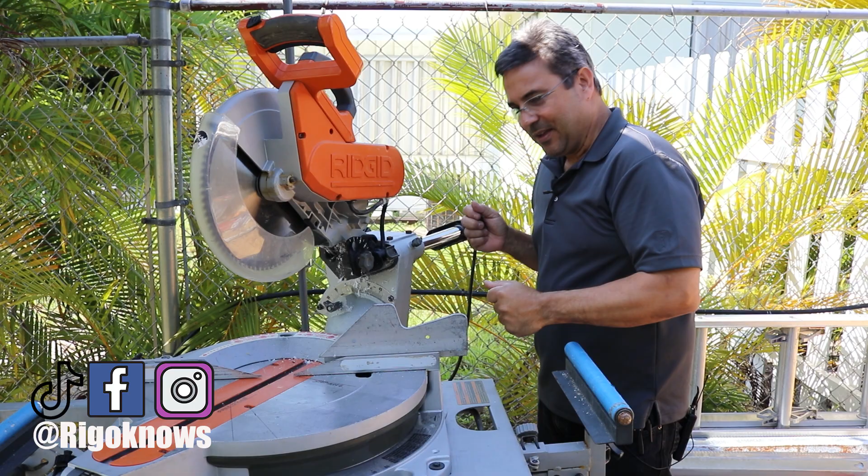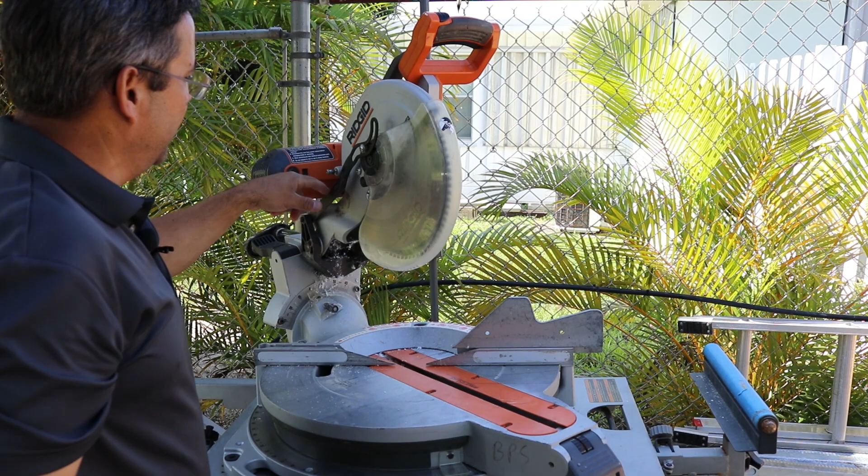Welcome back. We're going to repair where you hooked the cord to - it got snapped off, God only knows how. Also, another thing that broke was the guide to bring this up. It was a round thing here, and it's not there anymore, nobody knows anything about it. Well, we're going to 3D print a part, then come back and put it in, see if we can get this saw working. Now we're inside, and we're going to look at how we're going to make these parts.

This is the part that holds the cord on the saw. I'm going to talk a little bit about Fusion 360.

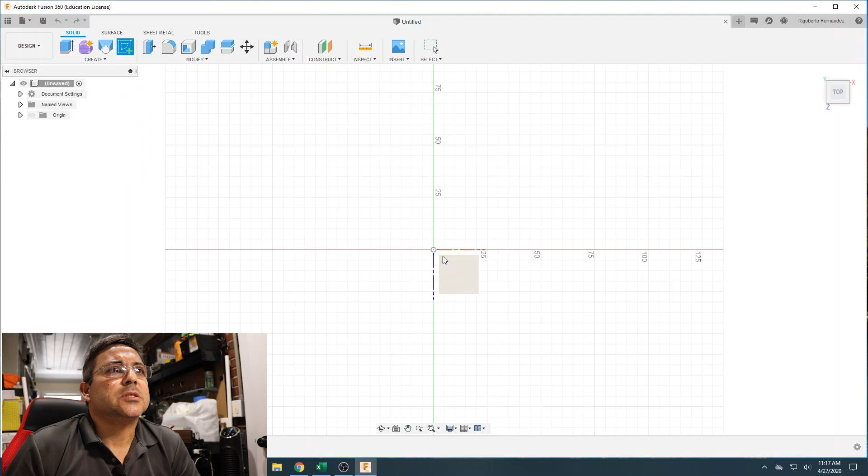So I'm going to make it exactly like this one. Now that the program is open, we're going to select top. I like to look at them straight down. So I'll select top, I'm going to create a sketch, and there we go.

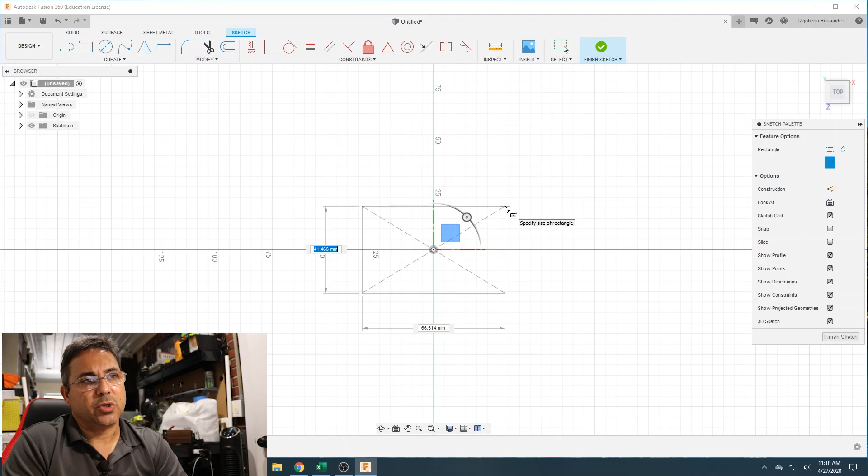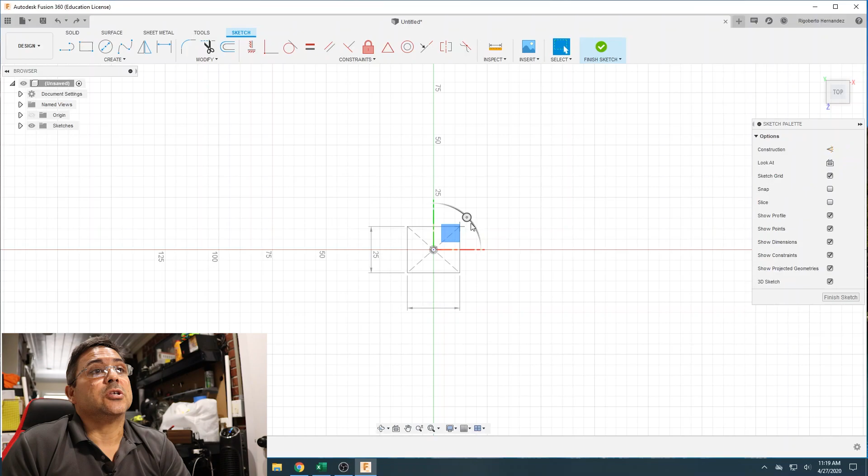Okay, I messed up - and you saw how easily you can mess it up. So instead of hitting enter, I'm going to tab so I can get the second number, which is going to be the side number, and that's 24.39. And there's my square looking down on it.

So now I'm going to extrude this. I'm going to finish sketch, 8 millimeters - you know what, I'll give it the exact amount. This is 7.73. Boom.

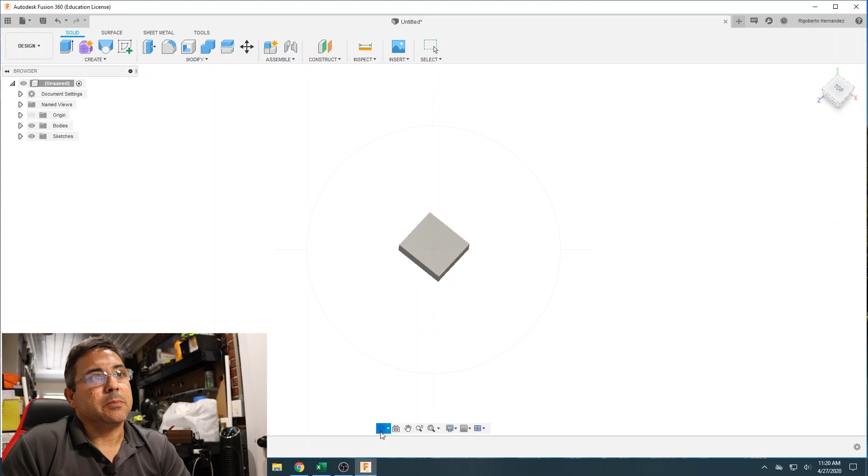So now you can see we got like a little solid block there. On the bottom part of this solid block, on this face, there's this little guy that comes out - it's like an L shape.

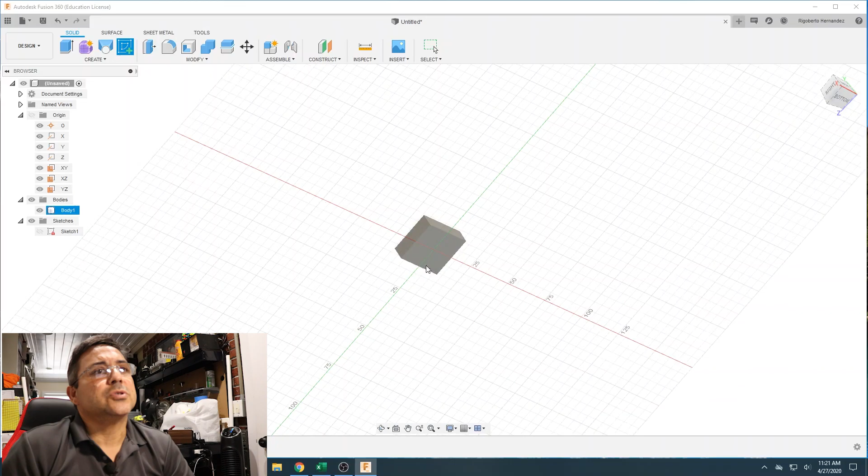So I'm going to create another sketch. I'm going to go to create a sketch, and we're going to choose - not the origin, which I could probably turn off. So now we choose the part that we're going to do, it's this one, and we're going to do another center rectangle.

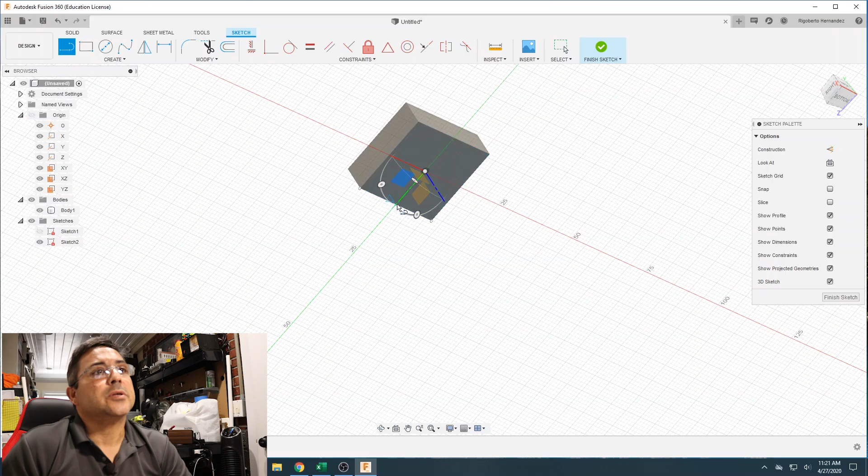Actually, before we do a center rectangle, I'm going to do a line. So I'm going to escape out of that. This thing is 13.90, so we're going to do a line, and we're going to go from this edge right there, to 13.90 - that's where our line is.

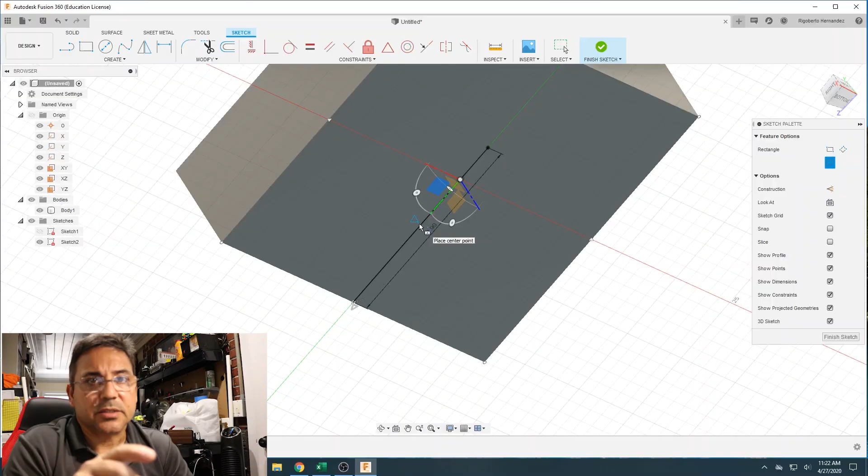So now when we do a rectangle here, when we choose a rectangle, get a center rectangle, now we can find the center of the line. This is important - the line gives you from the back of the part to the front of the part. So you're going to choose that, then come all the way up to there, and all the way out to there. And that's our rectangle. We're going to escape out of that, and then we're going to extrude it.

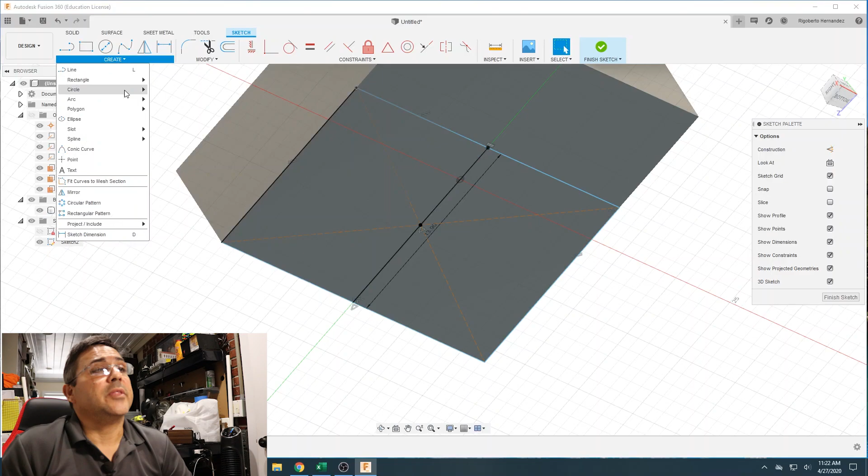I mean, this might not be the optimal way to do this, but at the end of the day, it gets it done. I'm going to make it a little thicker, a little longer, because the cord wasn't wrapping very good. So I'm going to go with 20.

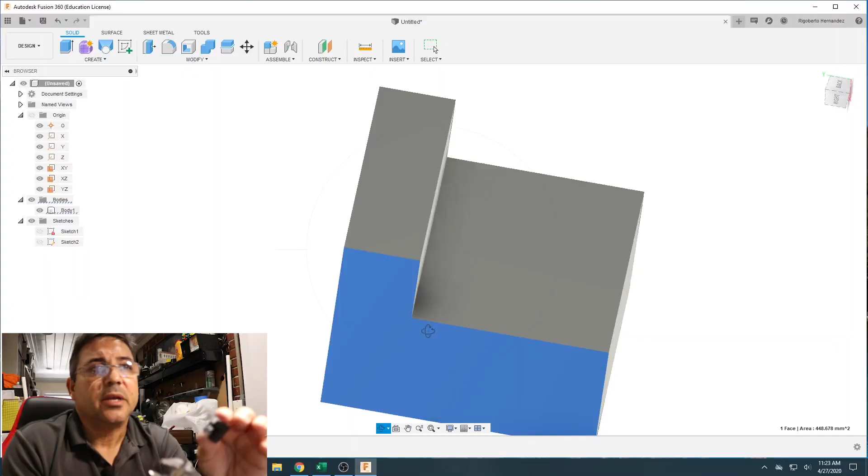And let's say that this part right here was too short this way, and you wanted to add a little more - so you can extrude it. Let's say you wanted an extra, and I'm measuring with my calipers, let's go with 5 millimeters.

So now we have a hole that goes through this part. We have a hole here that's a little under 10 millimeters, it's 9.50, and we got to locate where the hole is going to go. In this case, it's in the center.

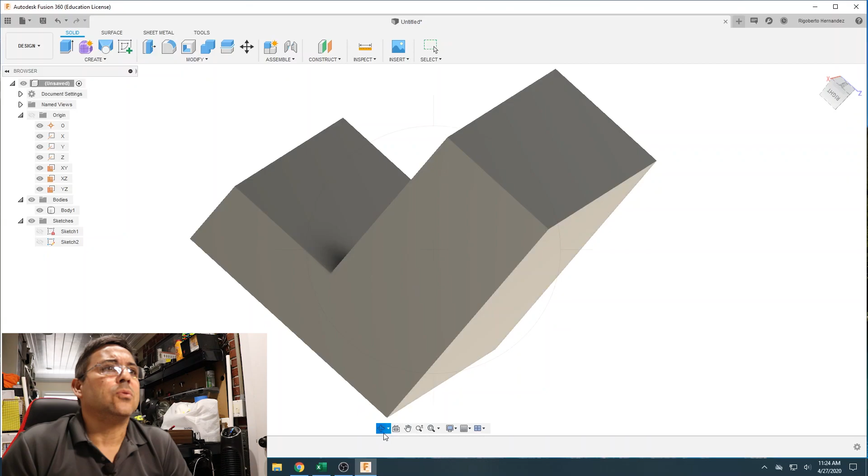So what I'm going to do is make the hole. I'm going to take this face right here and create another sketch on this face, and put it in the center there. I'm going to use the keyboard since it goes faster sometimes.

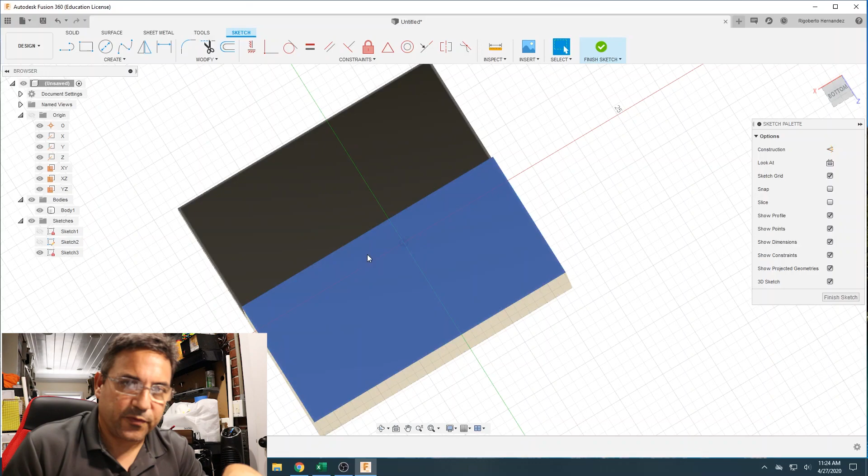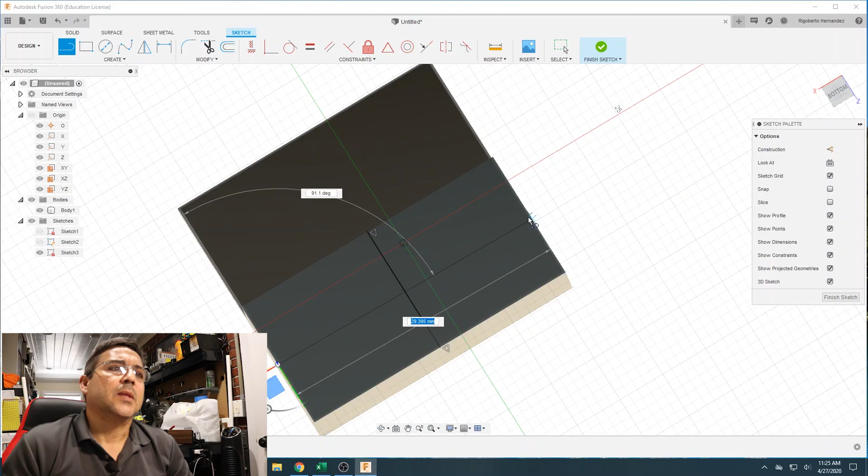If you hit L for line, it already tells you the little triangle means the center. So I'm going to go from there to there, and then from there to there. Now you can either stop your sketch, or, well, I just hit escape and there's your sketch.

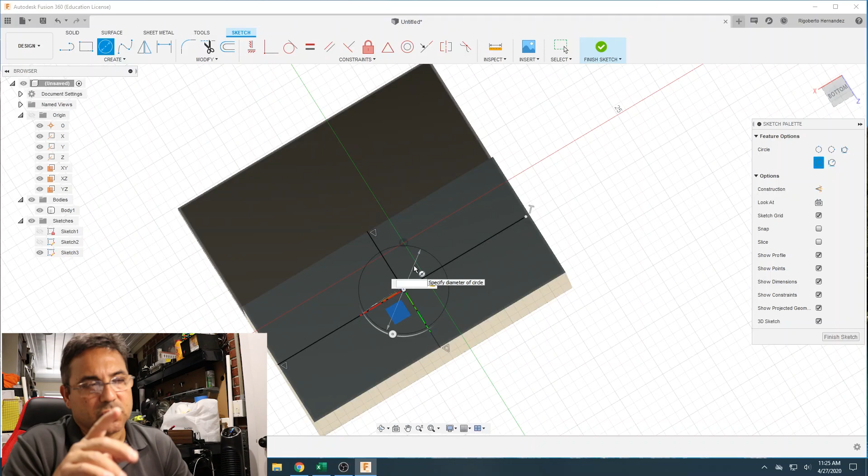Now I'm going to do a circle, C for circle on your keyboard, and you choose center. This is going to be the outer circle, 5 millimeters. It's the hole where the bolt goes through, 5 millimeters.

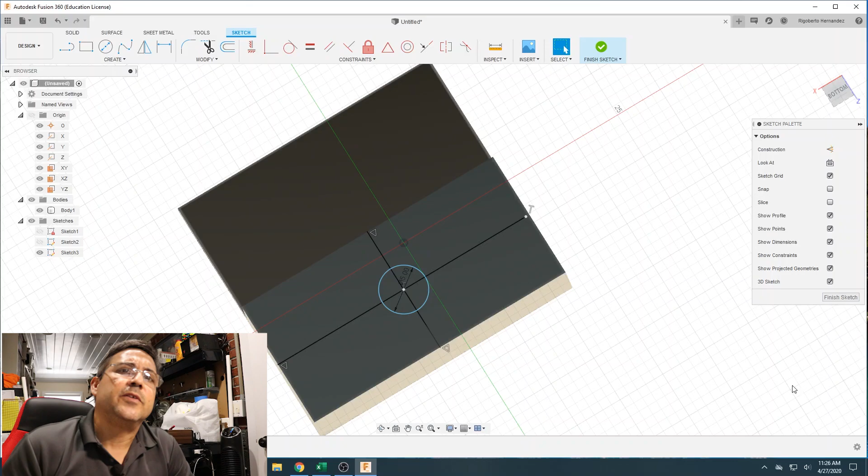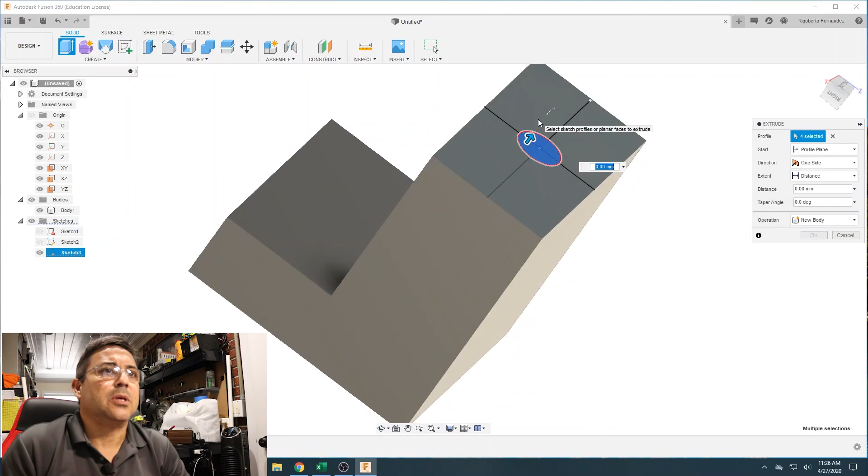We're going to extrude that first to go all the way through to the other side. So I'll finish the sketch and go to extrude. I'm going to choose all of these. You could delete the lines right away, but let's just leave them, it's a lot easier to fix things when you know what's there, and like I said, I'm not 100% on this Fusion software, so I'm still learning it. So I'm going to choose symmetrical over here, so whatever you pull one way, it pulls the other way too, just in case. Then you hit enter.

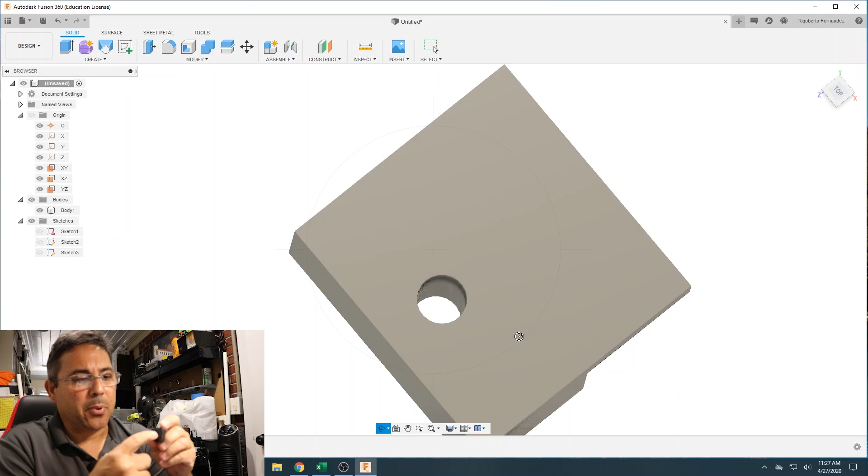Now we have a hole right through the part. Now this one has a bigger hole where the bolt sits in, so the bolt isn't sticking out. This one is, like I said, 950, and it's to a depth of, we can go with 784.

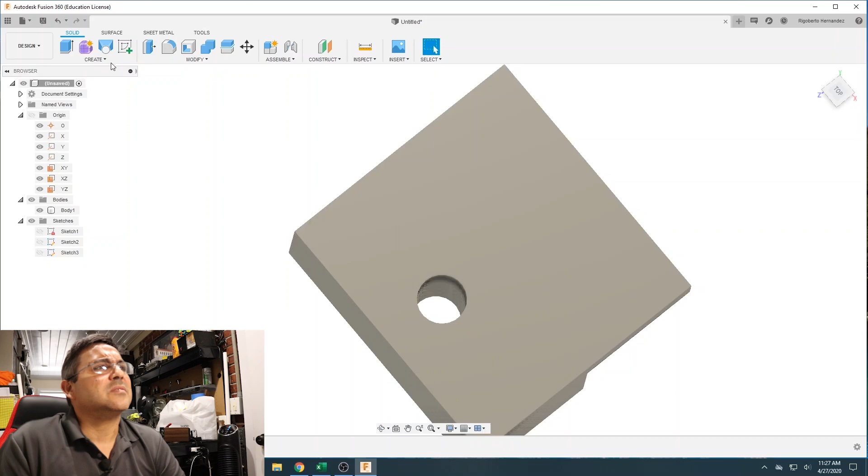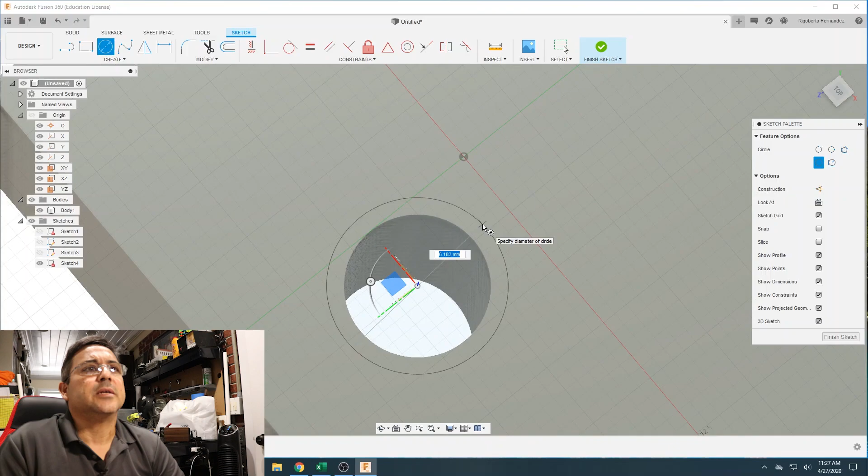So now we're going to create another sketch, and we'll choose the top of the part, then choose C for circle. There's a hole here, but it still gives you the center of the part. If you zoom in a little, you can see where the center is. So now you go with 950, hit enter, and now you can extrude that.

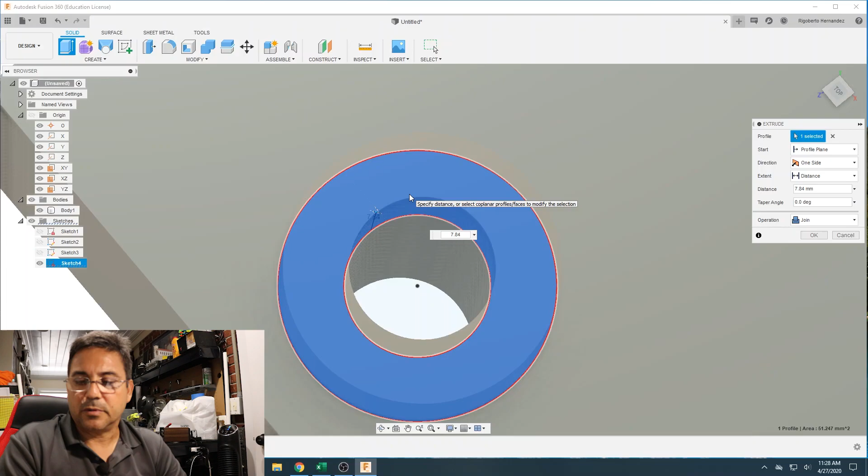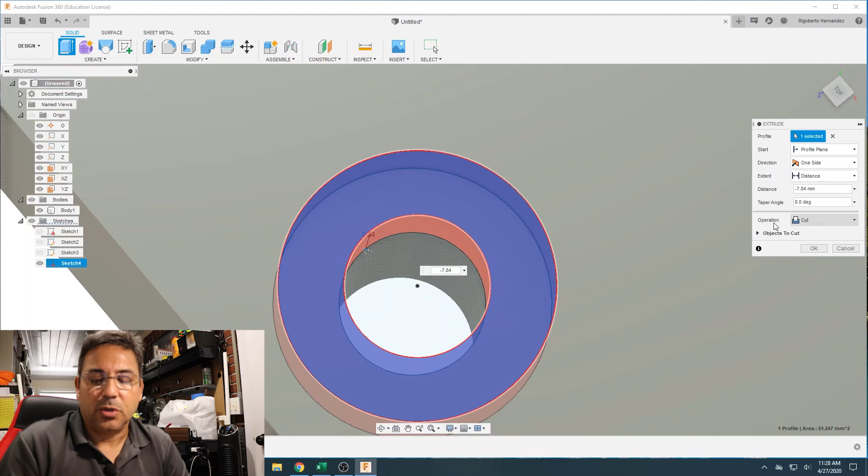Extrude, that's the part you're going to extrude, and you go down 784... 7.84. Wait a minute, I've got to put negative 7.84. That way, once you put negative numbers, you're cutting into the part, and if you look at this screen over here where it says cut, it's telling you what it's going to do. So you hit enter, and all of a sudden you've got a countersink in there for your screw or bolt or whatever it is.

You can see it's pretty deep. I mean, we could have gone...

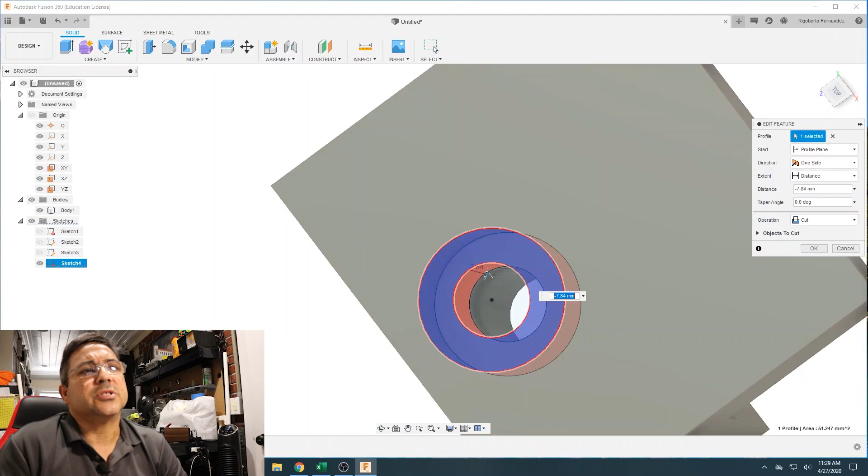Okay, so let's say you wanted to edit this. You can go over here to the commands, these are all your commands, this is everything that you've done, like a history of what you're doing. So you go here, hit edit feature, and you see how it's set. I can go 6 millimeters, negative 6 millimeters. So you could go on any of these and edit any time.

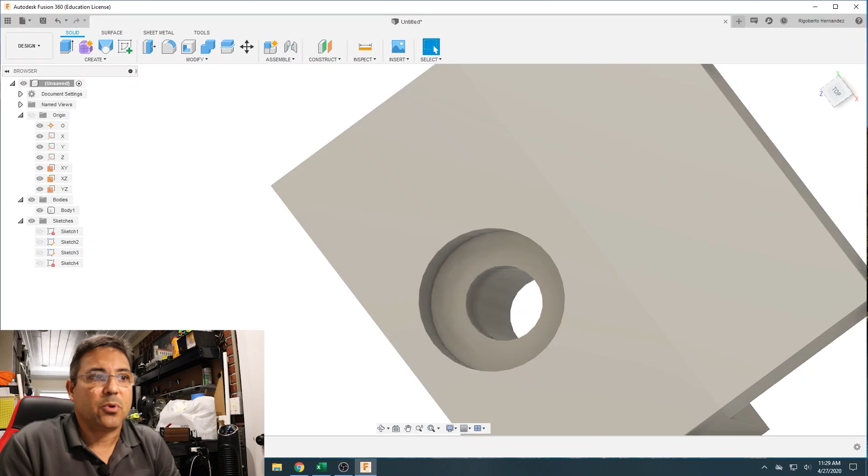Remember, once you edit whatever you did previously, it's going to affect the whole part. So you've got to be careful with things you edit, because it might go back and change a lot of dimensions on something else in your part. But for this application, we should be fine.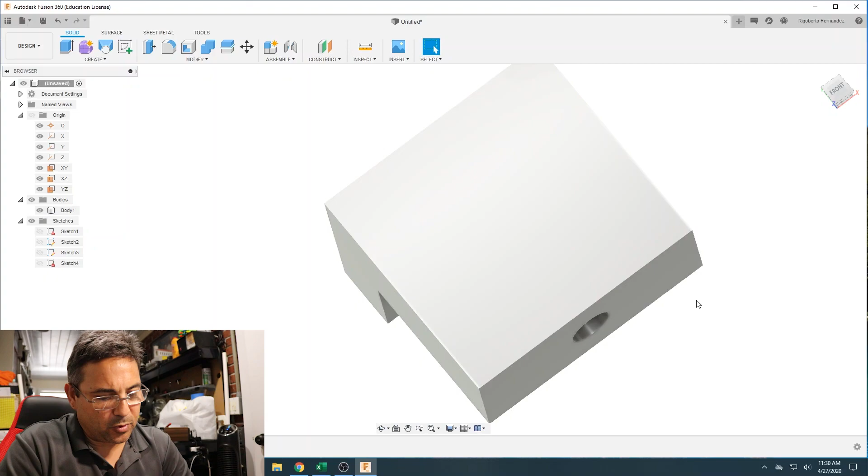So now the next thing we're going to do, okay, it has a round surface because it sits on something curved, so you have to make the part curved. How are you going to do that? I'm sure there's some math involved, but we're going to go the easy way. I'm going to find where my part, from this base, from here to the edge of the lowest part of the circle, because this is all a huge circle and you're only cutting a little bit of it.

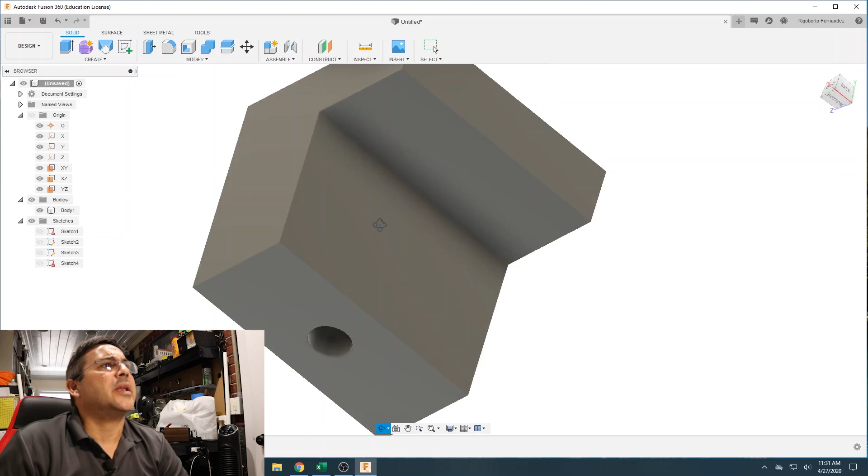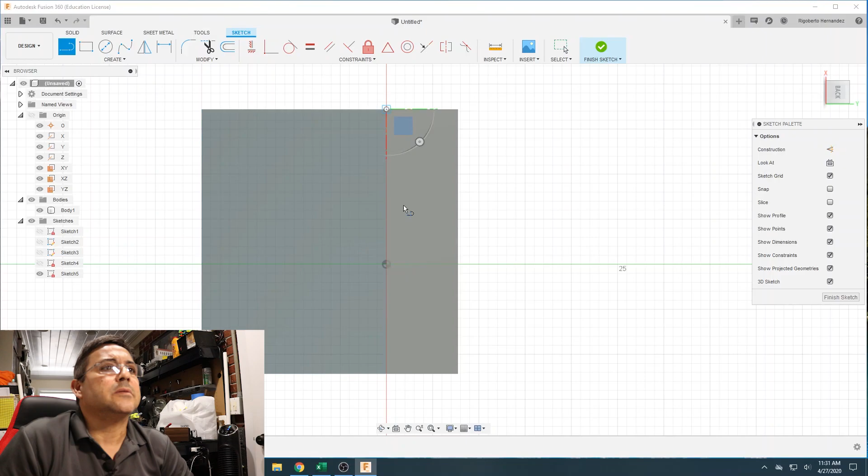So what I'm going to do is turn my part around, and create a sketch, and I'm going to choose this face back, I'm pretty sure. Yep. So what we're going to do, we'll lower this, there we go. So with line, we're going to go from there to there, and then now we're going to find the center. Make sure you're at 90 degrees. If you look at the screen, you'll see if you're a little off, then it's not going to be a good part. So make sure you're at 90 degrees, then enter, and now you've got something to work with.

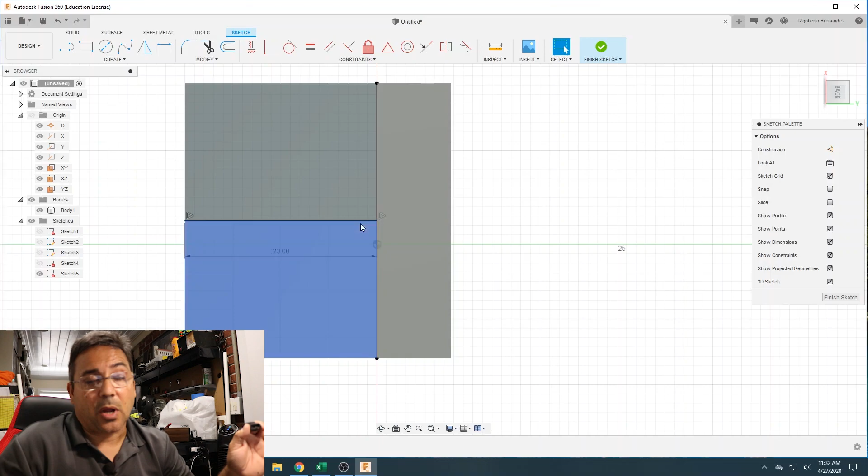These lines are only construction lines, so once you go to extrude or whatever, you can either delete them, or I usually leave everything. I'm not worried about the lines.